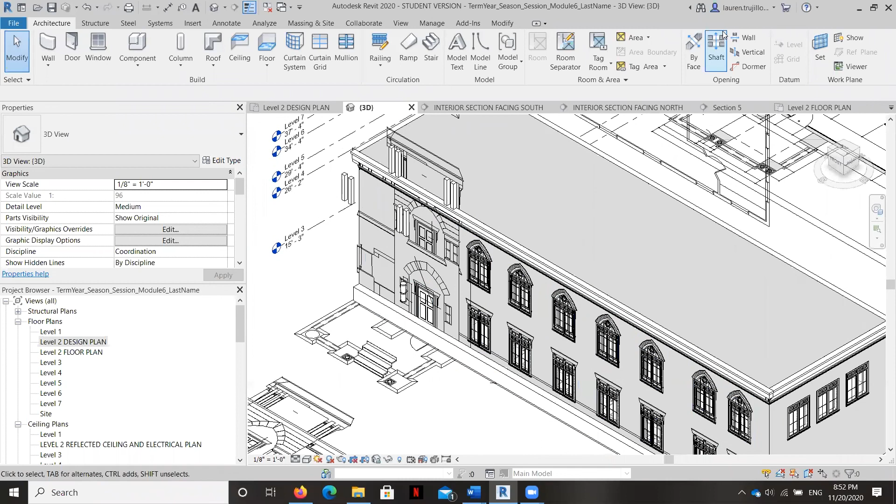In this video, I'm going to teach you the final model in place command that I use most frequently, which is called extrude. And we're going to start off the same way by selecting a reference plane, because we've learned that Revit likes to do that at the beginning. So I'm going to set it here.

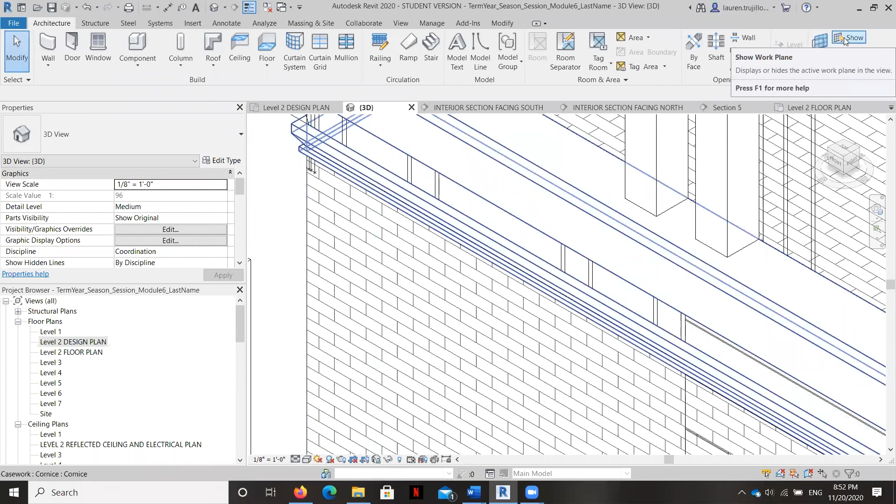And I want to actually set it to this back wall. If I can grab it there. If not, I can grab it right here. But I want the very front of it. Let me make sure that I grab it. If you hit this button over here that says show, it'll show where your reference plane is. Okay, so Revit knows where it is, so hopefully it'll let me move forward with my extrude command.

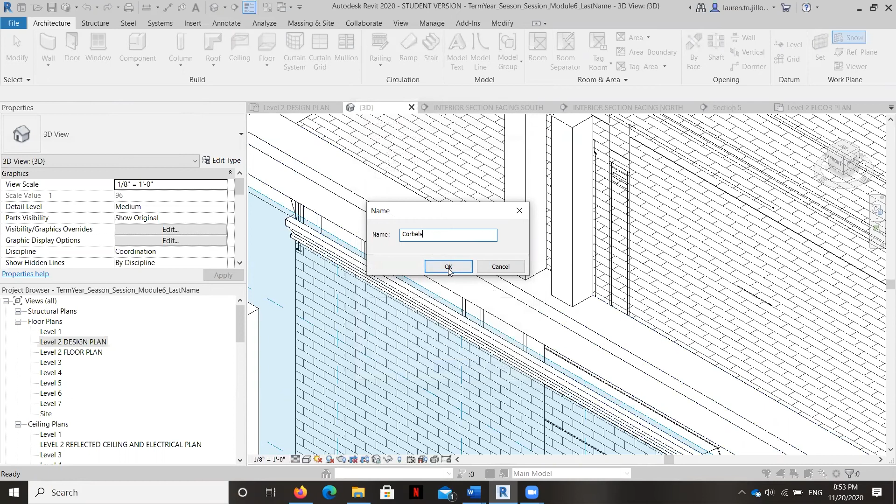What I'm going to do is, again, go to Architecture, Component, and Model in Place. This is going to also be casework because it's going to be part of the cornice. But this one we're going to call the corbels. So see, it wants me to set it again. Where we're going to find this is extrusion over here. So let's go ahead and hit the extrusion button.

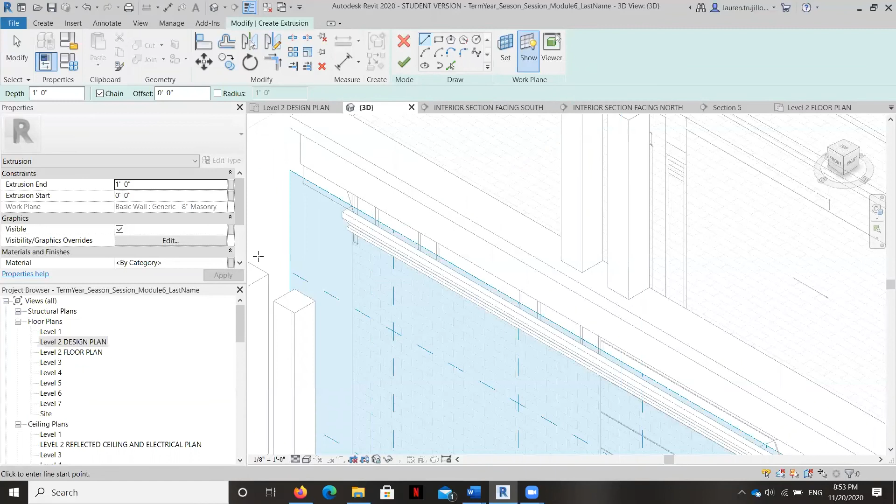Now, in order to set my extrusion, it's basically going to start on a plane and push forward or backward. And if you've ever used SketchUp, it's similar to the push-pull command in SketchUp, except that you have to associate it with this reference plane. So I'm going to go back again to my south elevation. And I'm going to create a corbel right here.

Now, the corbel is sitting on the front of the building here, and it's kind of messy with this AutoCAD file. This AutoCAD file is not exactly aligned properly, so there's going to be a couple places where it's just not going to work properly, so we're going to have to make some changes. But right now, we're going to start by using the side profile right here as a guide for our extrusion, and then we'll mirror the extrusion across this top sweep that we did and place the remaining corbels over here.

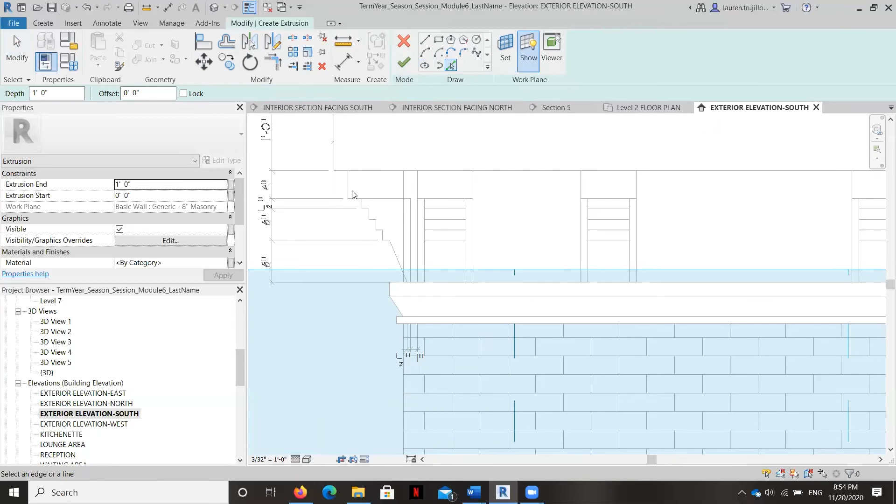So let's go ahead and start with this profile. I can pick a couple lines here. That one's going to be too long, so we shorten it.

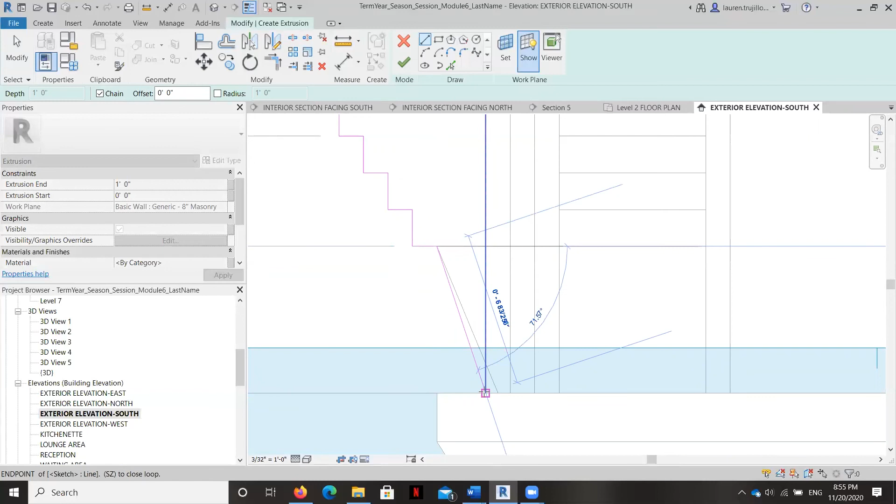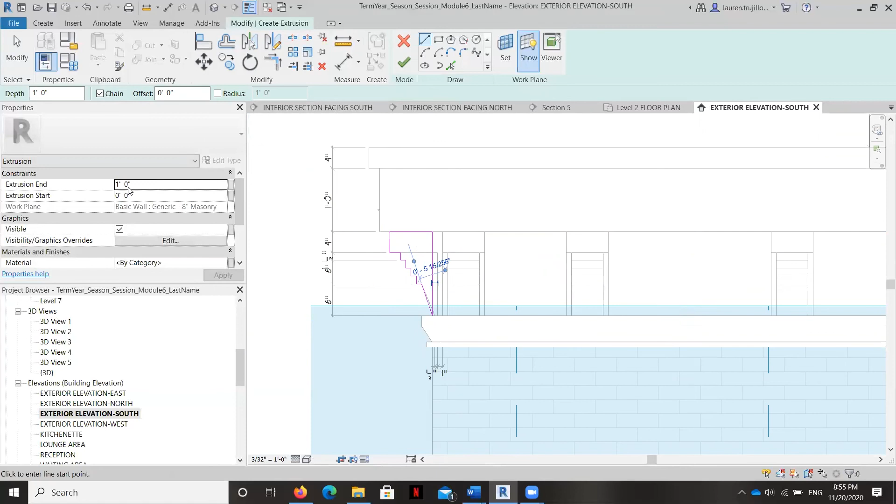Okay, so this is the closed loop that we're going to extrude. And you can see here, it's asking over here the extrusion start and end point. Now, the start point is the reference plane. And the end point, if it comes towards us, would be 8 inches, because I can measure this and find out that the depth of these corbels are 8 inches deep, or pardon me, 8 inches wide. So the extrusion point here will be 8 inches, and it will actually be pushing backwards, so it's going to be negative.

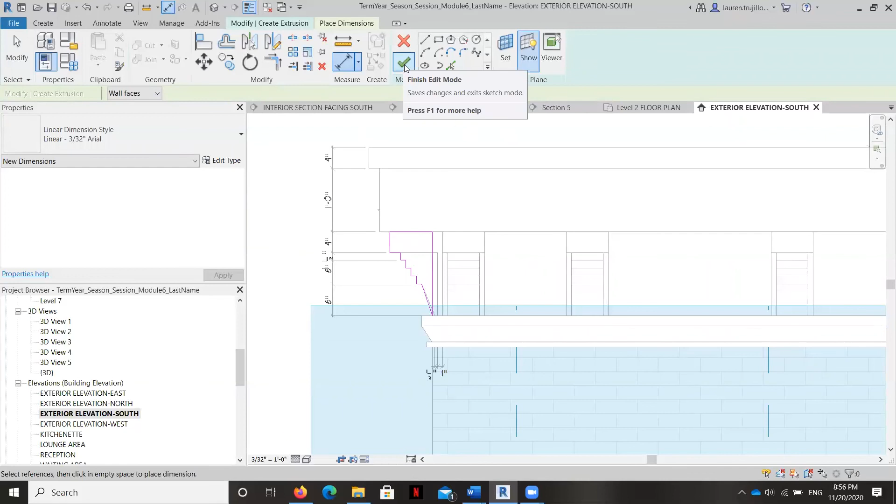Now, it looks like my dimensions have kind of confused Revit a little bit, so I'm going to just hit the green checkbox, because it's very easy to change the extrusion after the fact. So I'll hit that checkbox, and you can see the extrusion end is at 1 foot, and ours is actually going to be 8 inches. Now, I'm going to put -8 inches so that you can see what happens. And I'll hit apply and then the green checkbox.

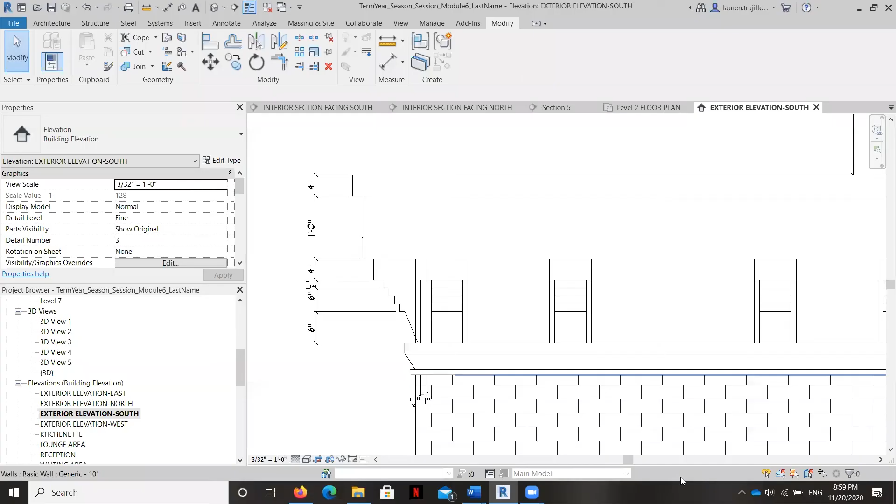And it looks like I've been getting this message a couple times when I've been practicing it. So I'm going to pause it one more time and just see what's going on. Okay, so it turned out that I think what was happening was Revit was not really liking that real pointy end here. And then for some reason, the reference plane of the front of this building is giving Revit a little bit of grief.

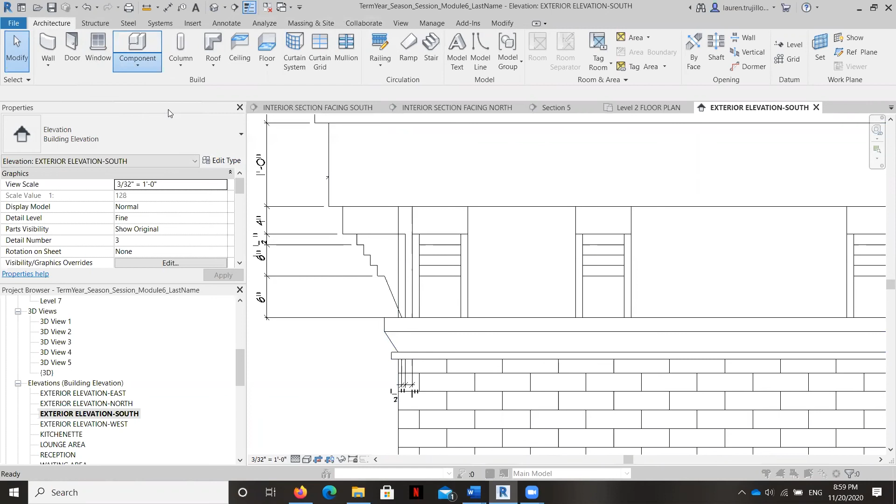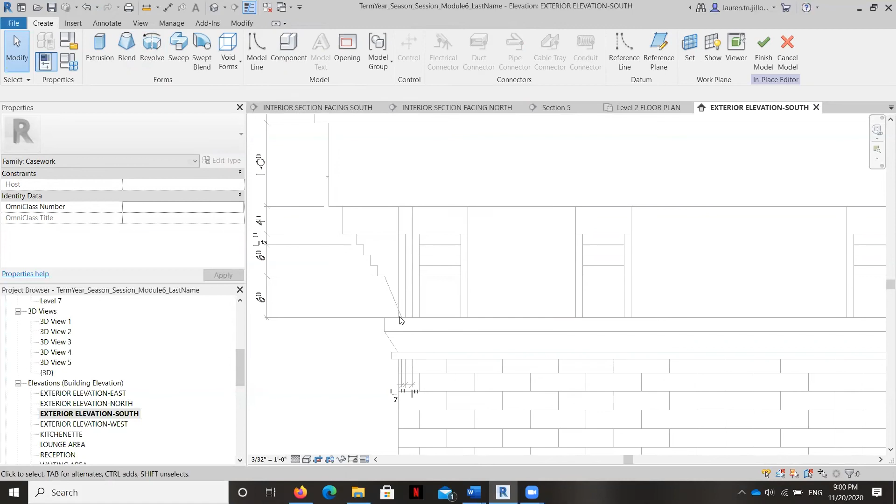So all I'm going to do now is go ahead and rework that command. Once again, we'll do casework and we'll call it corbels. And I'm going to set up the reference plane to be this front here, because it's close to the face, but it's not on the face of that wall. So that should go a little bit easier. And then for that real pointy edge, I'm going to skip that and then bring it out forward just a little bit. So you'll see what I mean in a second.

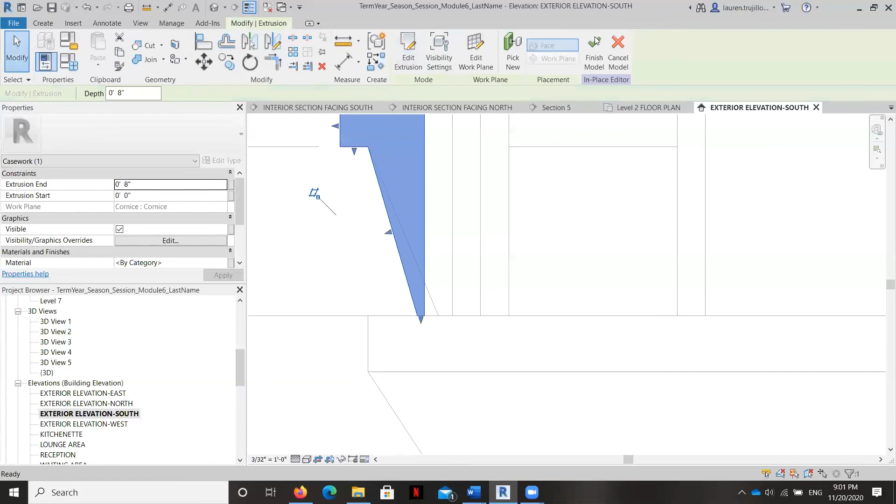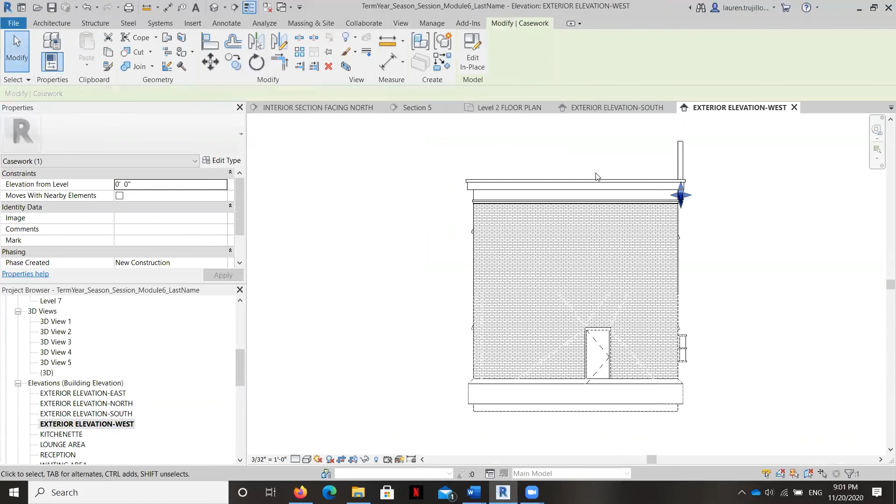Okay, that worked a little bit better. So we're going to just take a quick look at that corbel over here. You can see it, and it's extruding forward 8 inches because I didn't do the negative when I extruded it the second time. So what I'm going to do is just go to that west elevation. You can see the corbels right there, and I'm going to use my arrows to move it if it will let me. It may not let me.

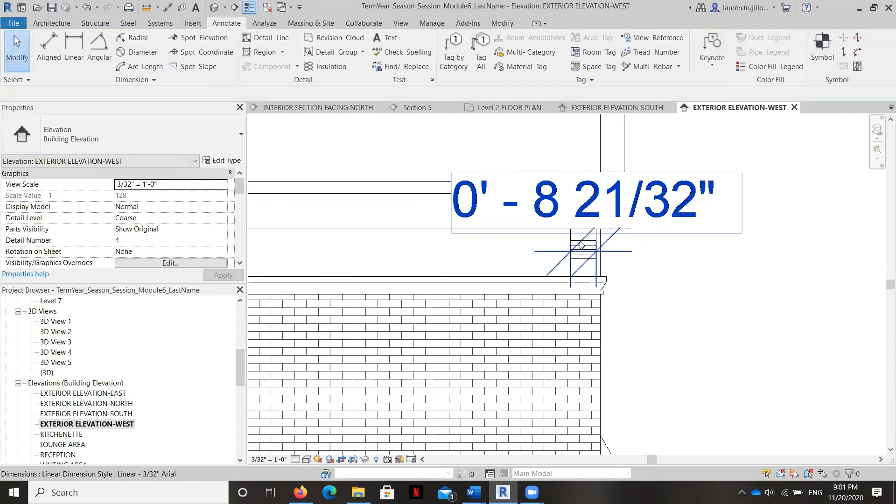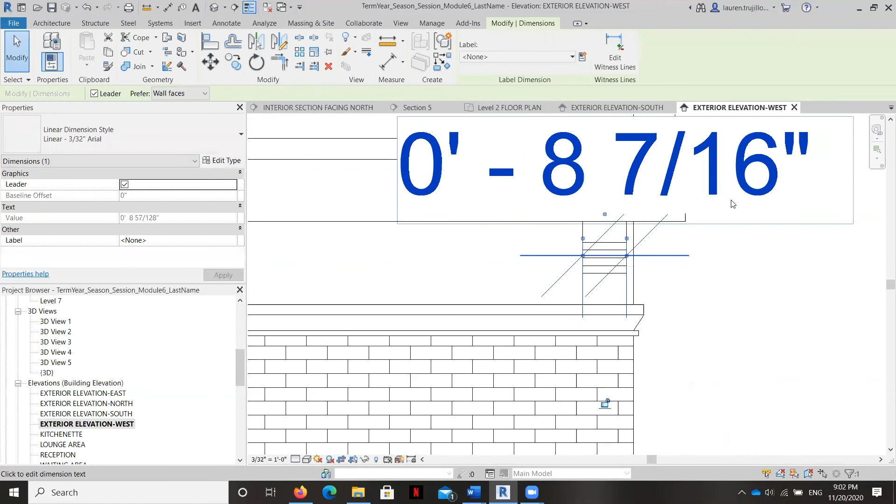So I'm going to do it like this and stretch it this way. And let me make sure that it is 8 inches wide. Usually you can overwrite the dimensions, but it's misbehaving for me just a little bit.

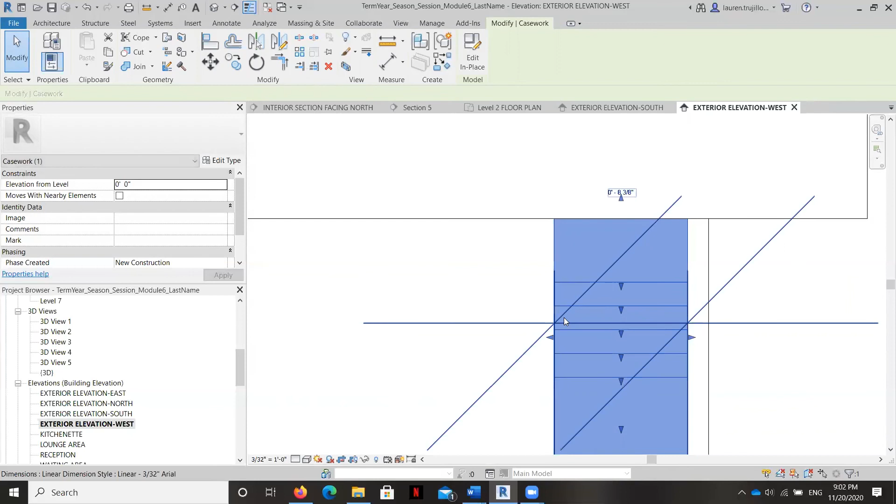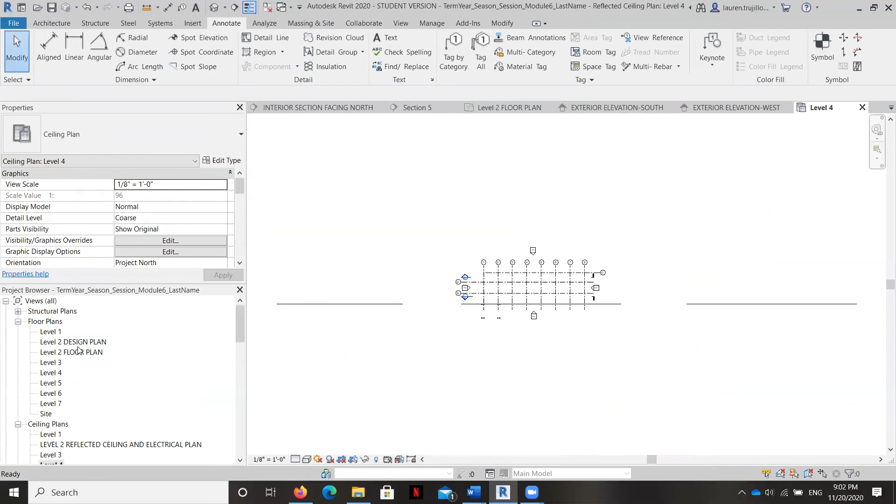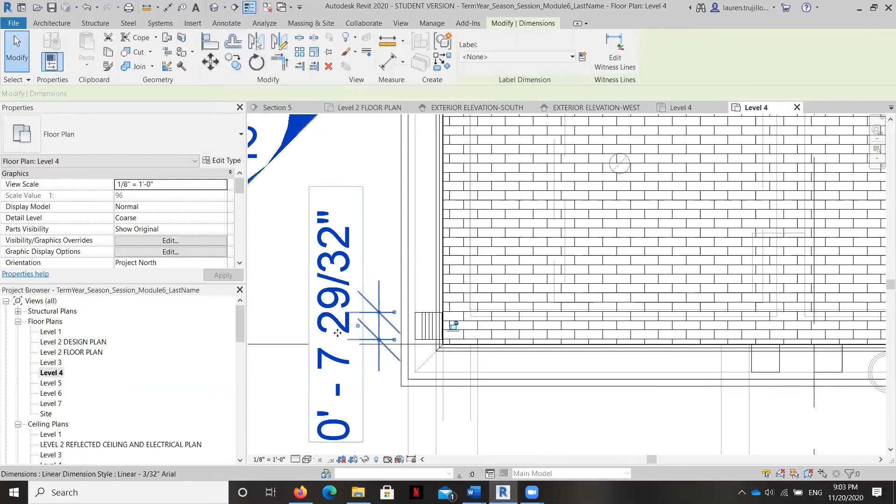Okay, let's go ahead now, and I'm going to move to the level 4 design plan. And you'll see why in a second. I'm going to go ahead and move to the wireframe view so I can see my corbel right there. And I still really want to make this 8 inches. Let's take a look one more time. I really want that to overwrite for me, but it's not working. All right, well, I'm just going to leave it at that for now.

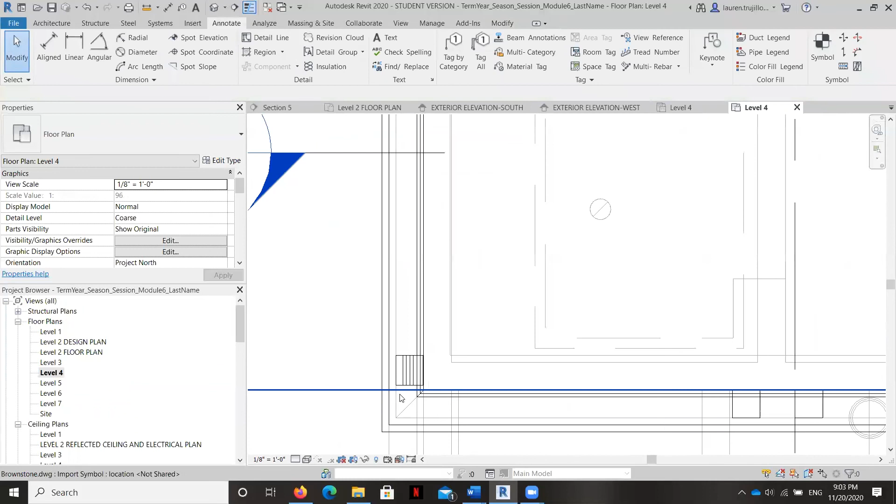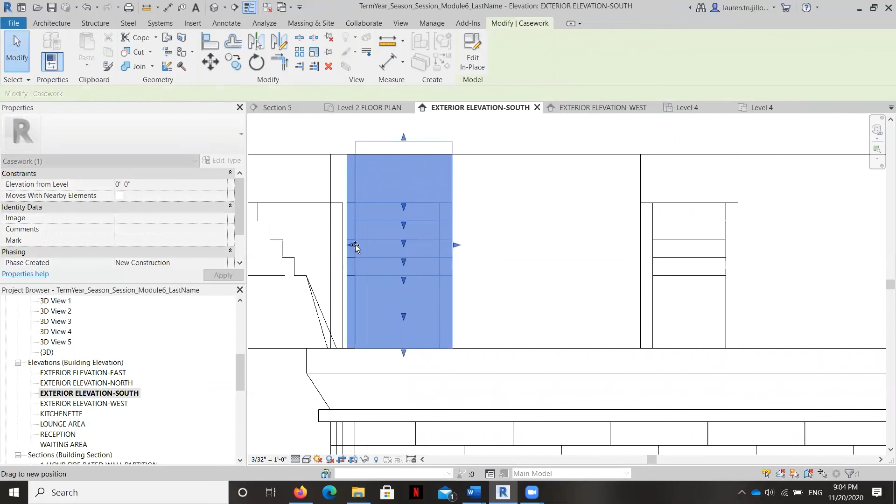Okay, so now what I need to do is I need to copy these corbels kind of equidistant across over here, and then I also need to bring them around the front of this building as well. So I'm going to start by mirroring this. Now we'll see if it lets me do it without fixing the constraints. Oh, perfect, there it is. Okay, so what we'll do first is I'm going to go back to that south view, and you can see there's my corbel right there. And this one will let me align it. Perfect. Okay. Now I've got my 8-inch one.

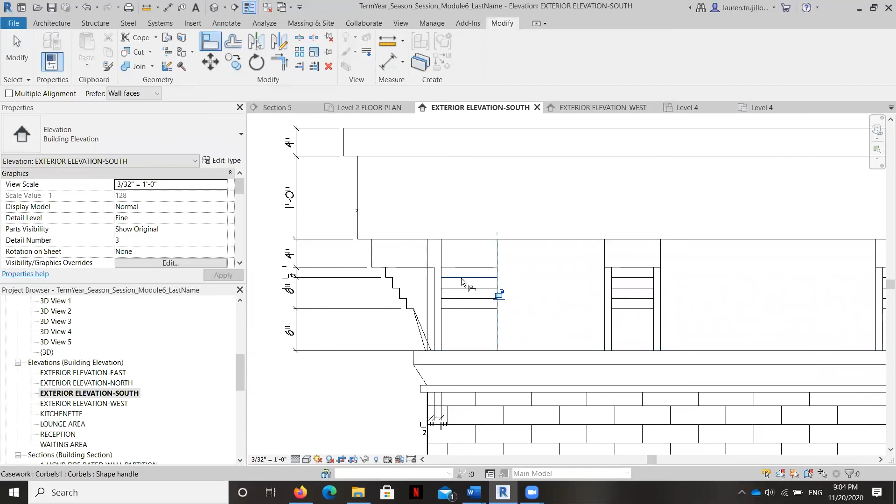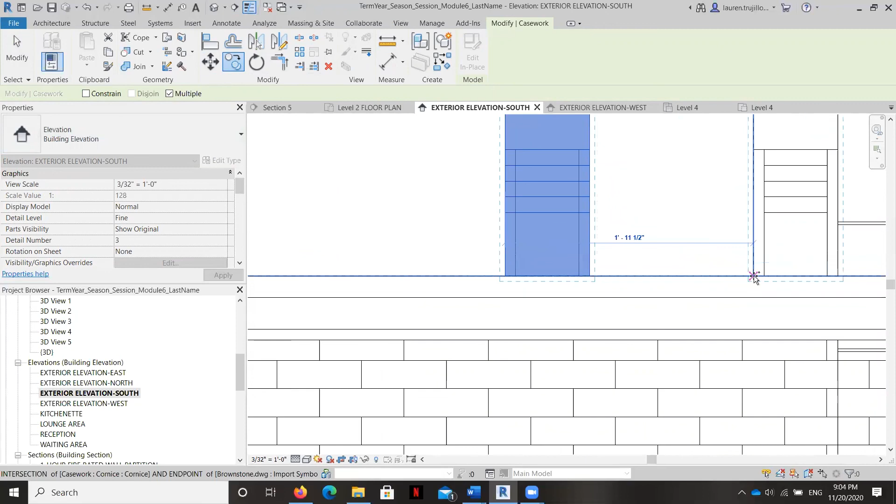Perfect. Okay. So now what I can do is take this and copy it here, here, and here. I'm going to unconstrain it, and that'll allow me to move it a little bit. I can move it across this elevation really easily, but that constraint will allow us to move these in other places if we need to. We've got another one here.

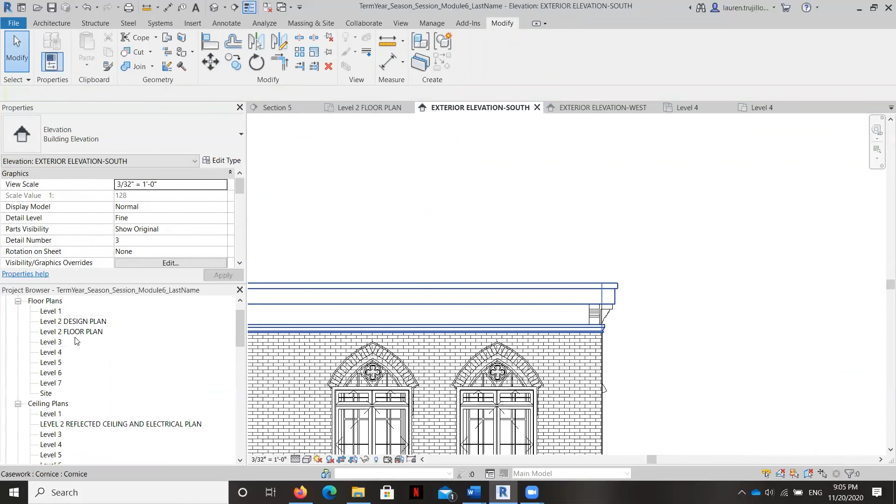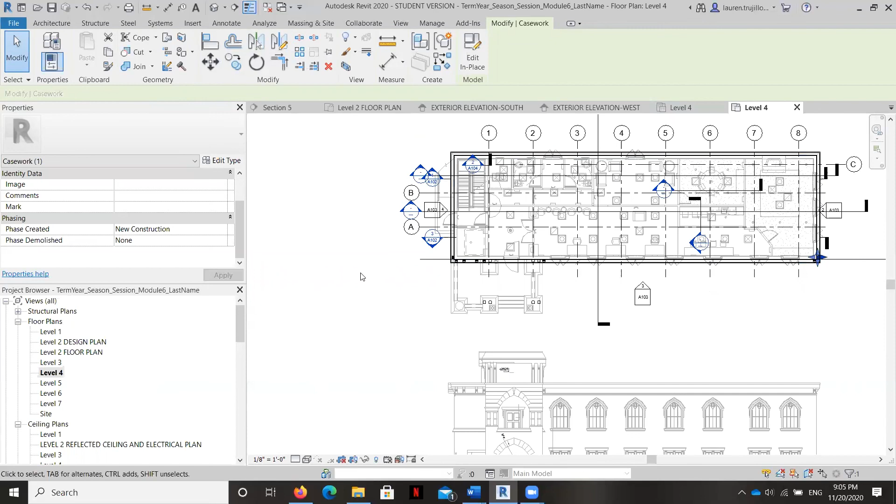I'm going to go back to that level 4 view, and I'm going to delete that one because it's the bigger one. Mirror this again. Okay. There's also one over here that needs to be mirrored. Okay. And now we don't have a side elevation in CAD for this, so I get to figure out where those corbels are going to be.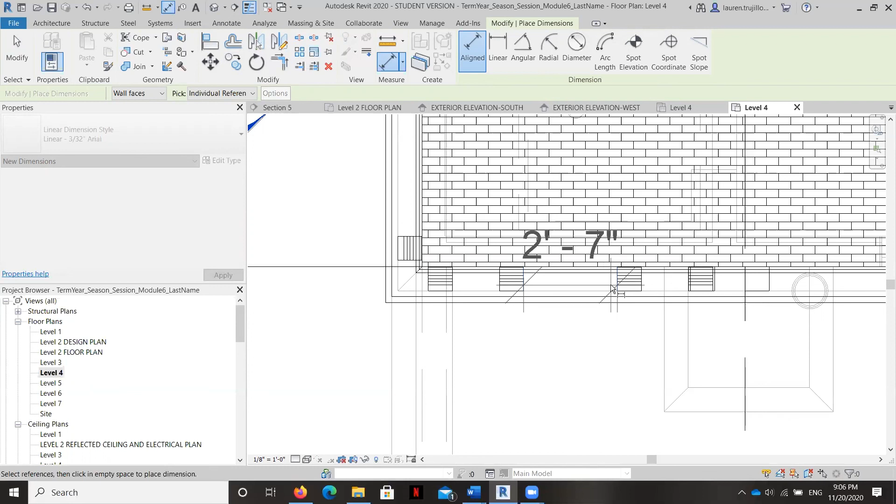Now, if I measure the front, I can see that they are 15.5 inches apart. And then there's a little bit bigger gap in the middle. But I'm going to go ahead and measure that gap as well. So 15.5 and 2 feet 7. I'm going to write that down. Okay. And then let's go ahead and go back to that west elevation. And then let's copy these over. So I'm going to copy this one.

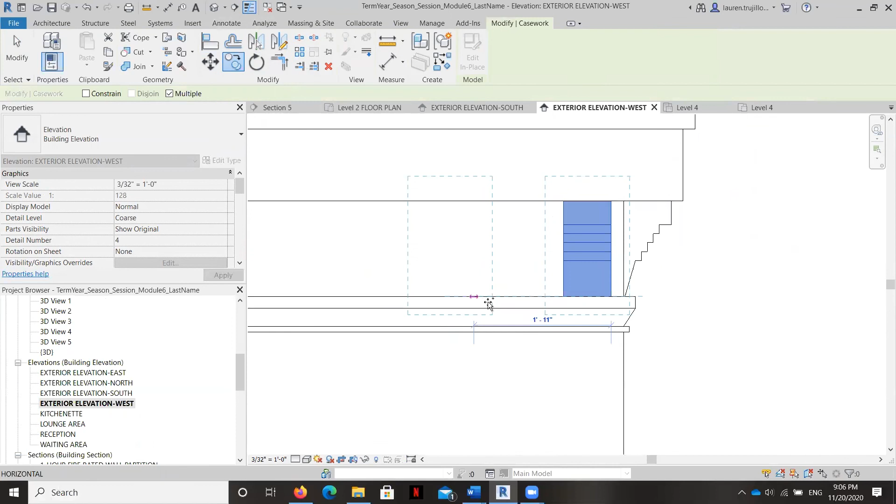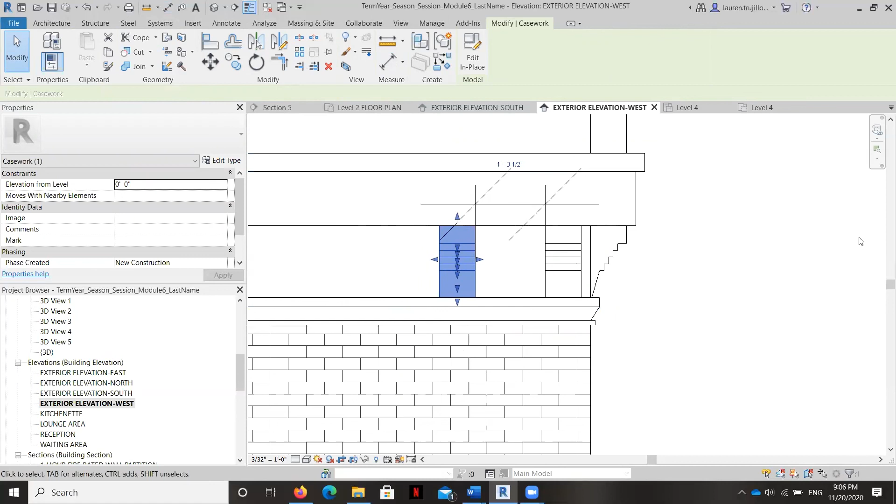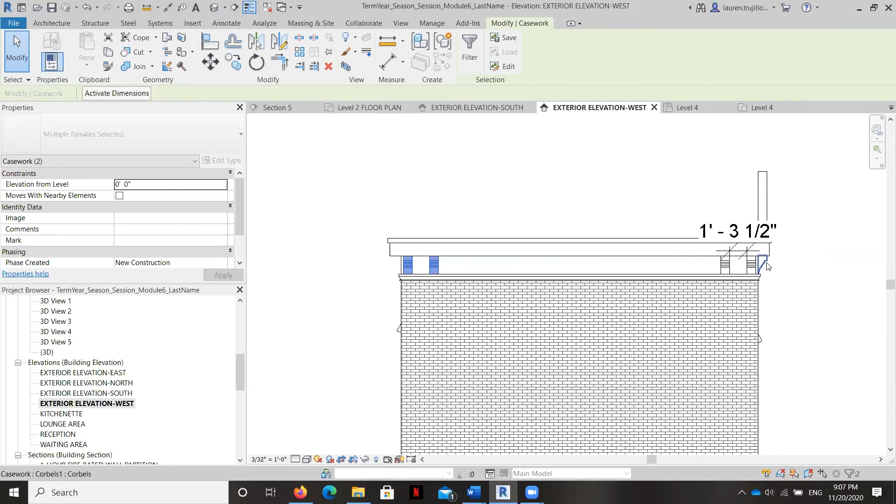So I'm trying to get it to 15.5 inches. Perfect. All right, and then we'll mirror these over to the side. It looks like we need another one over here. There we go. Okay, and we still have some space in the middle. We could put another pair in the center. So I'm going to create a detail line in between these two, and you'll see the purpose of that in a minute.

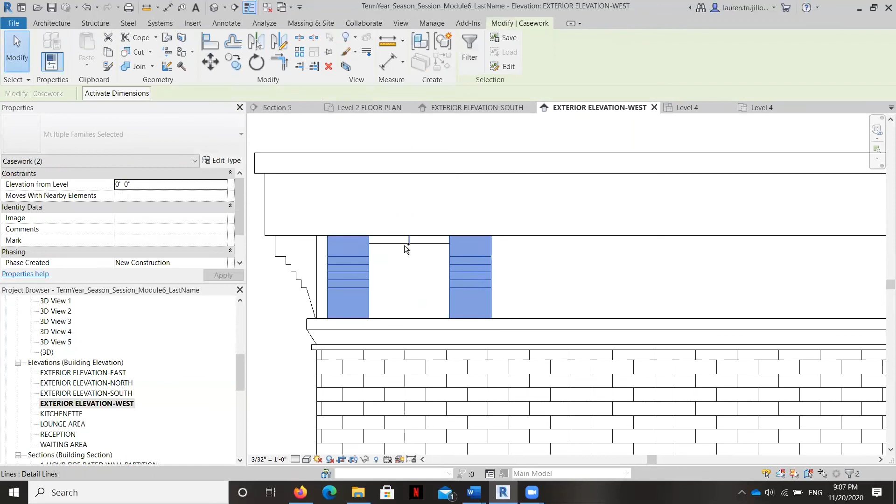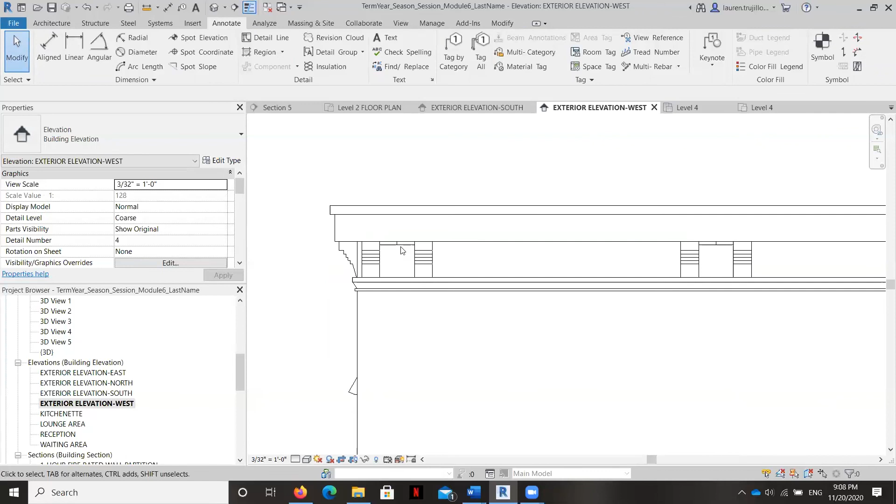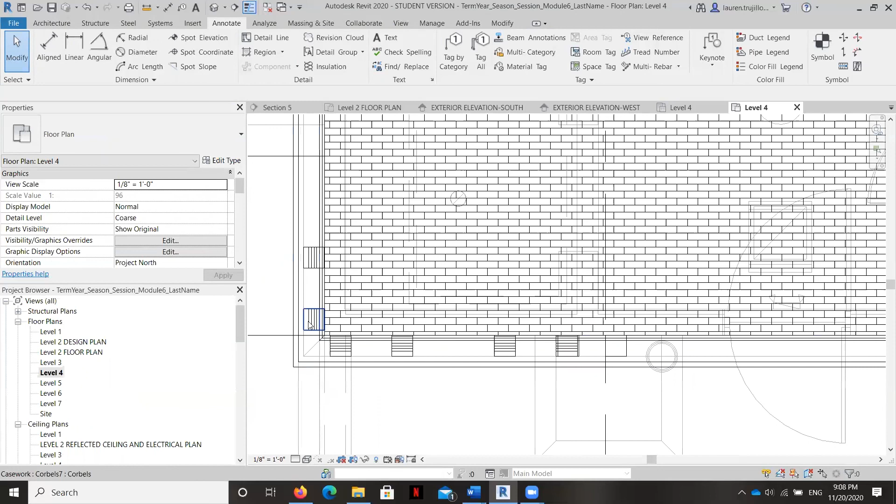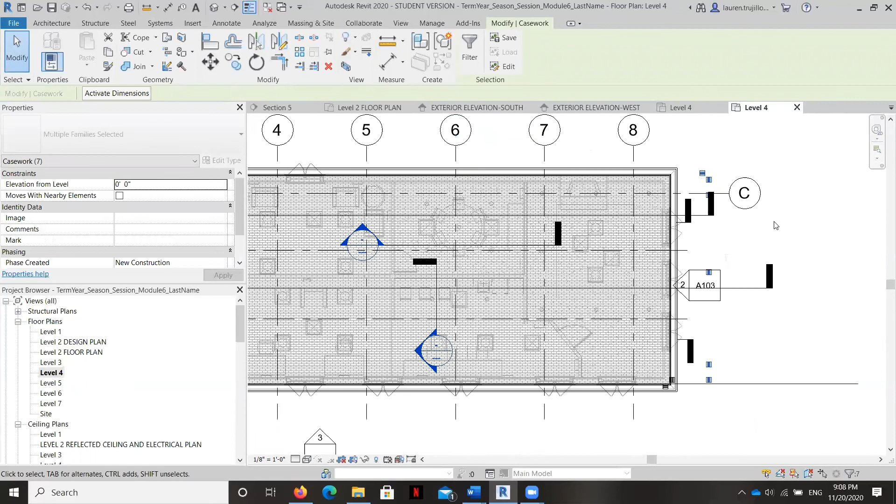Okay. And let's go ahead and let's leave it at that. Let's go back to that level 4 plan. And let's copy these to the other side. Now, as far as where the midpoint of this thing is going to be, let's take a look. We can just move these over. One's going to be overlapping.

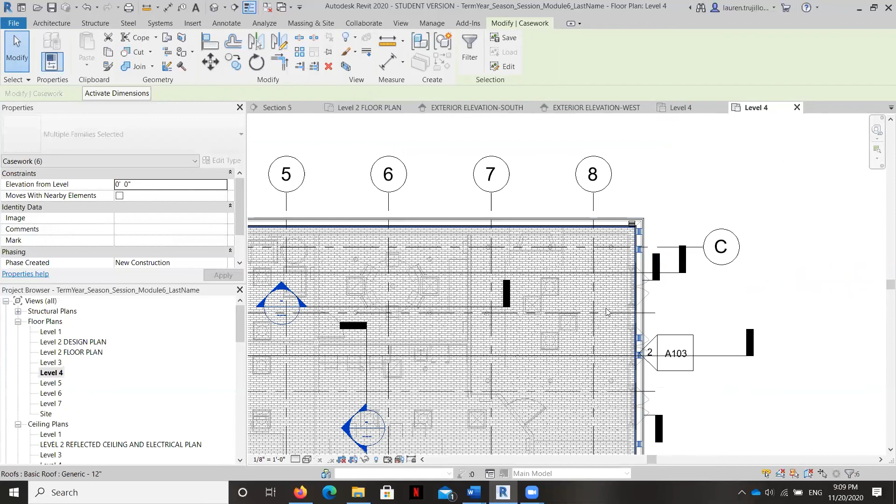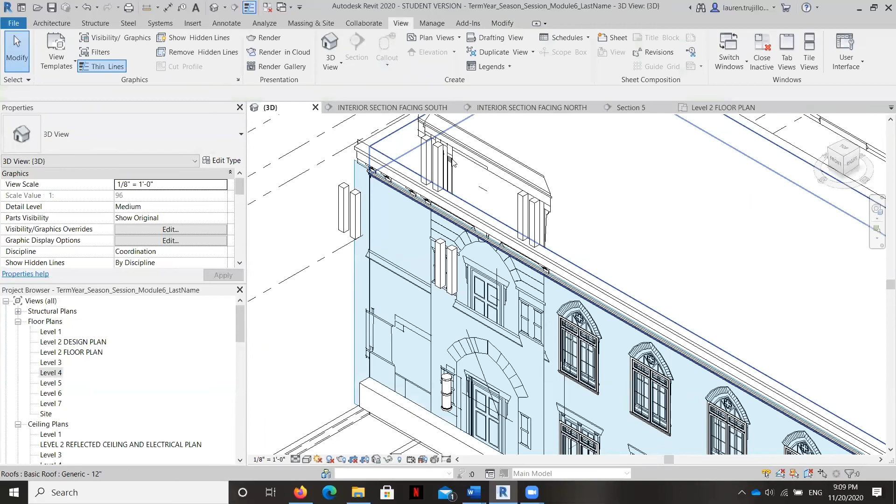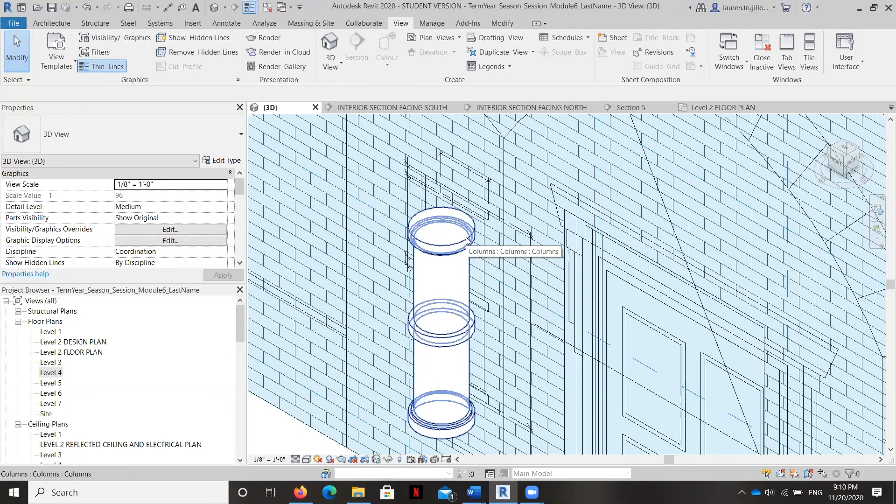Okay, so now you know how to use a reference plane to create a series of extrusions. Now, keep in mind that with extrusions, I said create a series of extrusions to create this. And keep in mind that something like this column, that's actually one, two, three, and then four separate extrusions, because the extrusions are all individualized based on the height. So if this is an extrusion at 3 inches and this is an extrusion at 24 inches, you can't do both of those extrusions at the same time.

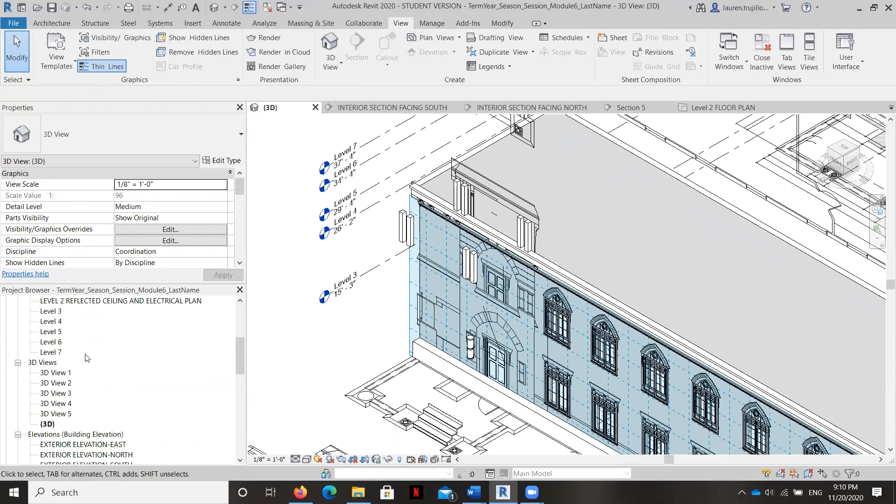So just keep in mind, the extrusions are intended to be very, very simple geometry. And again, this is all just kind of mass. It doesn't have any architectural meaning. If I slice through it, it would still be just mass. But when you look at the elevations, it actually adds a really beautiful architectural character as well. Looks great.